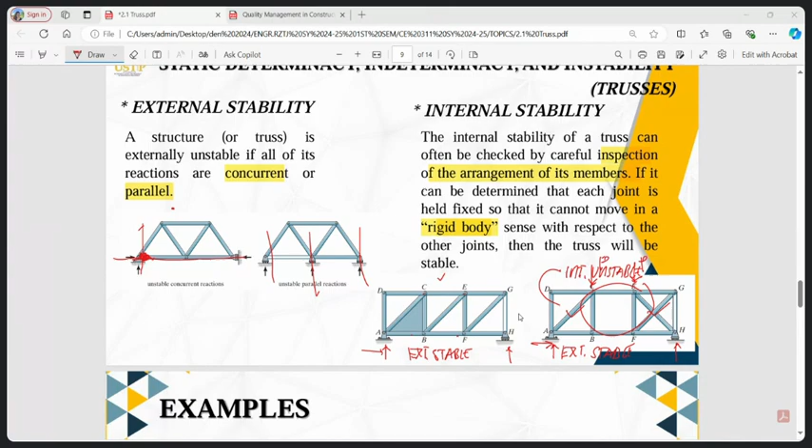So that's it on identifying the determinacy and stability of our trusses. Let's go to the example.

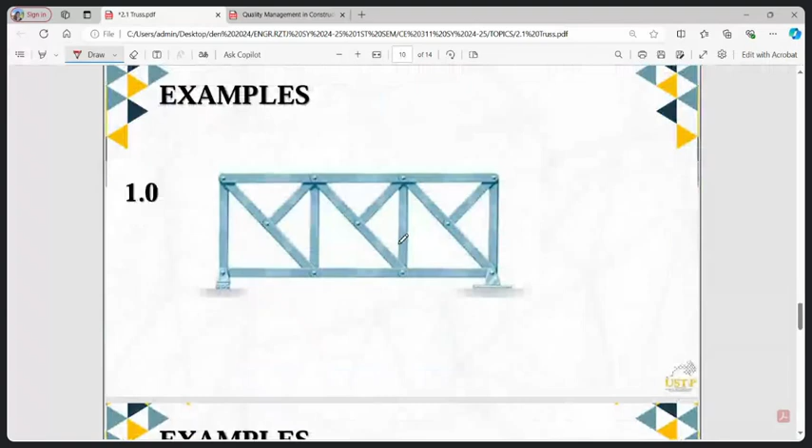Let's check the reactions first. This is a roller, this is a hinge, so the line of action - okay, so our truss is externally stable.

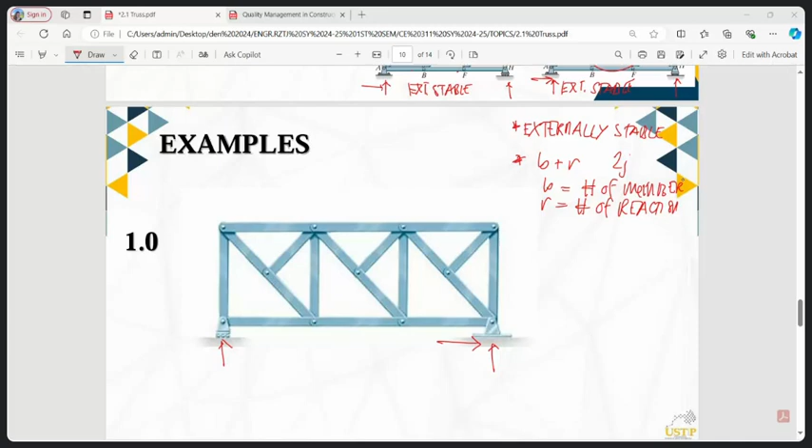Then we will check its determinacy. B plus R equals 2J. B is the number of members, R is the number of reactions, and J is the number of joints. So let's count the number of members.

Careful counting: 1, 2, 3, 4, 5, 6, 7, 8, 9, 10, 11, 12, 13, 14, 15, 16, 17, 18, 19 members. Remember class, members are separated by a pin - pin to pin you consider as one member. If the member overlaps and there's a pin in the middle, with no pin in the middle, you consider this as one member and one member.

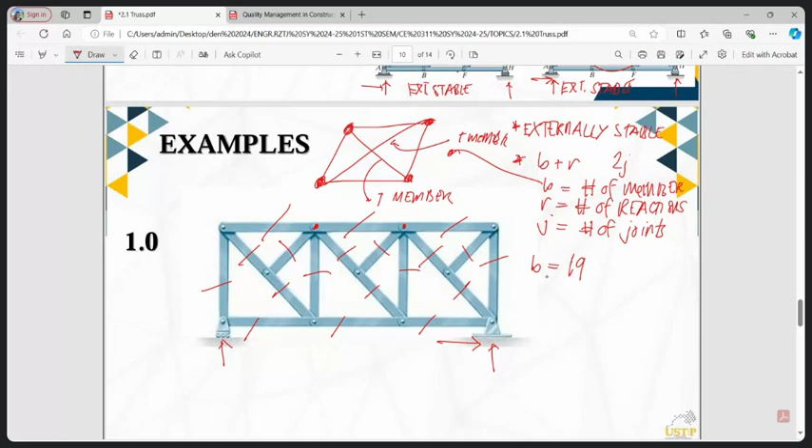So B is 19, reactions is 3. Number of joints: 1, 2, 3, 4, 5, 6, 7, 8, 9, 10, 11. So 19 plus 3 equals 2 times 11, so 22 equals 22. So our truss is statically determinate.

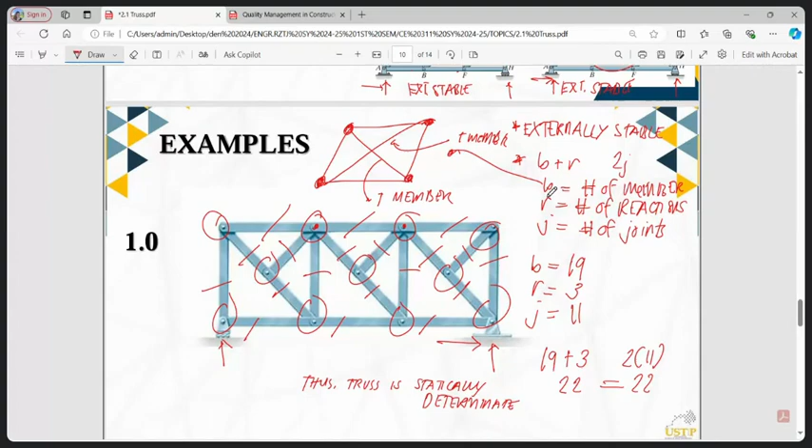That's how it is. Example number 2: this is a hinge, this is a rocker. So okay, our truss is externally stable.

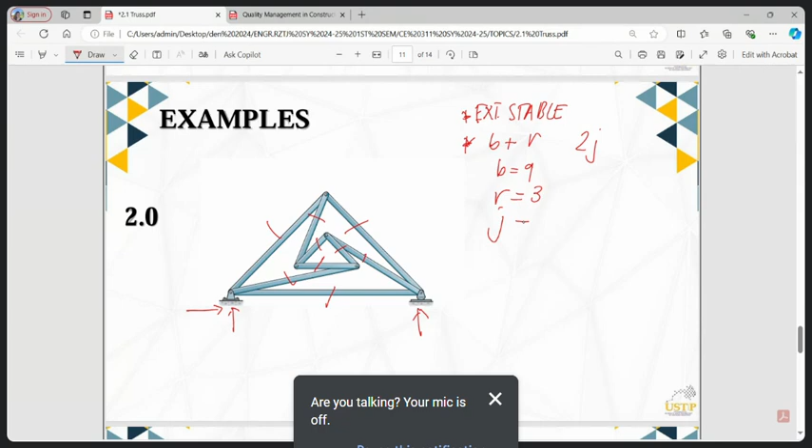So B plus R equals 2J. Number of members: 1, 2, 3, 4, 5, 6, 7, 8, 9. B is 9, R is 3. J is 1, 2, 3, 4, 5, 6. So 9 plus 3 equals 2 times 6, that is 12 equals 12.

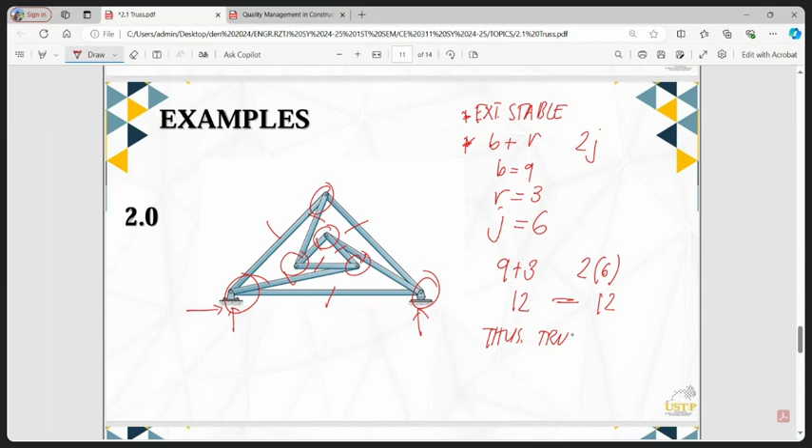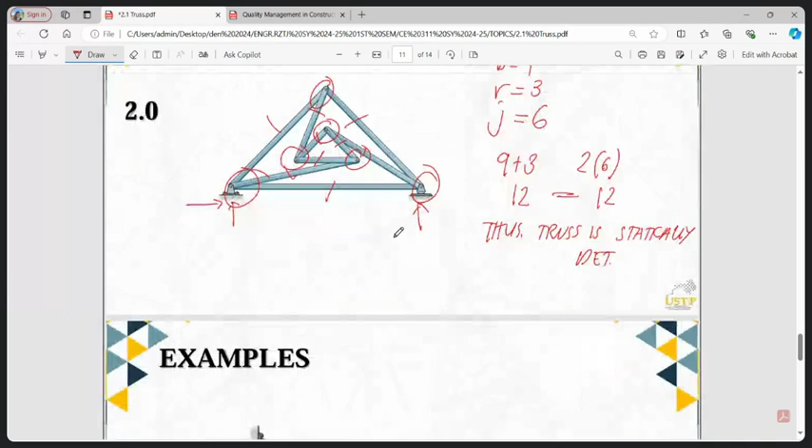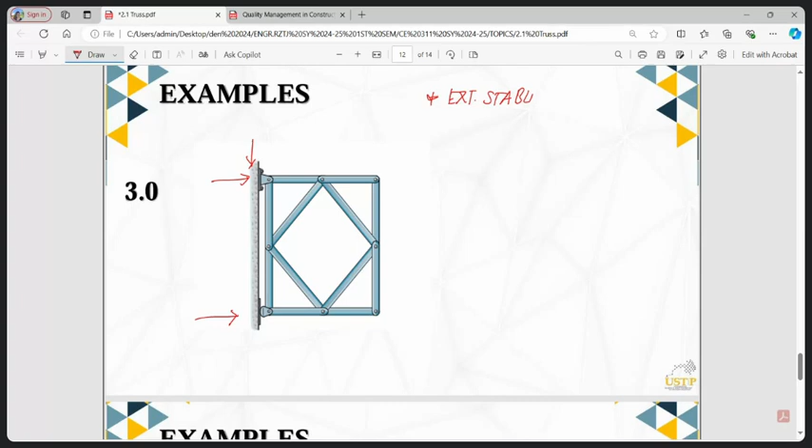Example number 3: one hinge, and also one rocker. So, externally stable. Then check for the determinacy.

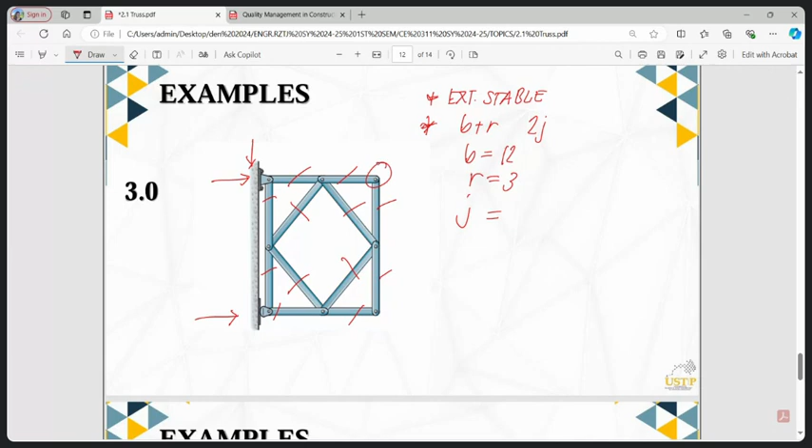B plus R equals 2J. Our B: 1, 2, 3, 4, 5, 6, 7, 8, 9, 10, 11, 12. R is 3. Number of joints is 1, 2, 3, 4, 5, 6, 7, 8, so 8. 12 plus 3 equals 2 times 8, so that is 15 and 16. So 15 is less than 16.

So this is internally unstable. Thus the truss is unstable - the truss is unstable, because it's less than.

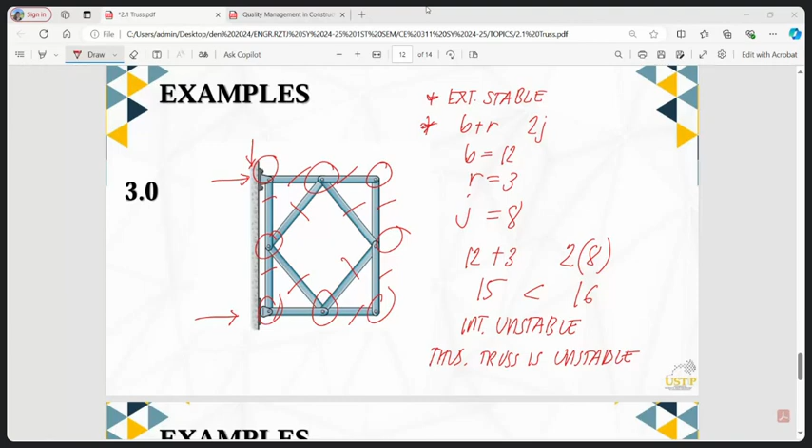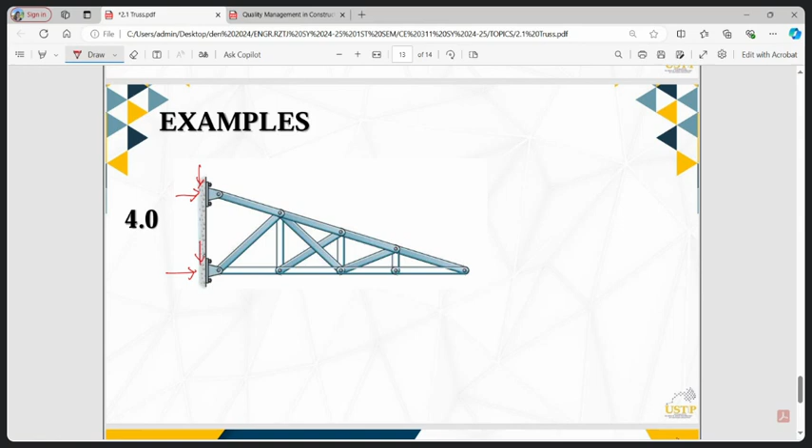Alright, so it's unstable. So example number 4: this is a hinge, this is also a hinge. So okay, this is externally stable.

So check for the determinacy. B plus R equals 2J. Our members: 1, 2, 3, 4, 5, 6, 7, 8, 9, 10, 11, 12, 13. Now look at this - there's no pin in the middle, so it means this cannot be counted separately. We only count this as 1, so 14, 15. So: 1, 2, 3, 4, 5, 6, 7, 8, 9, 10, 11, 12, 13, 14, 15.

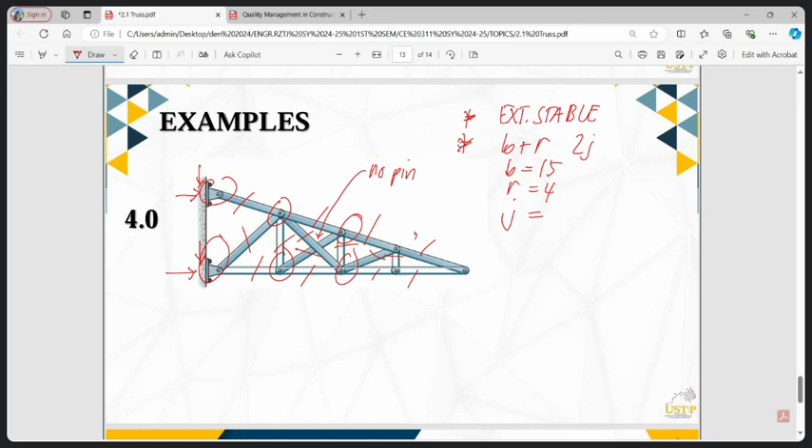Our R is 4. Our J is 1, 2, 3, 4, 5, 6, 7, 8, 9. Our J is 9. So 15 plus 4 equals 2 times 9, that's 19 versus 18. Thus the truss is statically indeterminate.

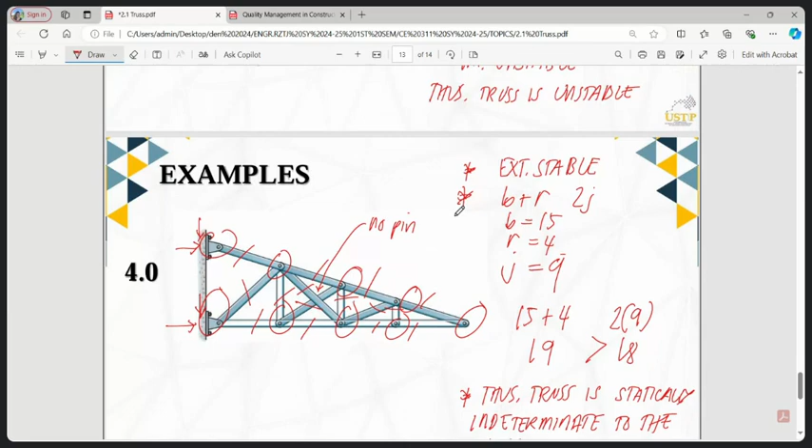Indeterminate to the first degree. So it's the same calculation, same computations, just different equations - different for beams and trusses, and different for our beams and frames compared to our trusses.

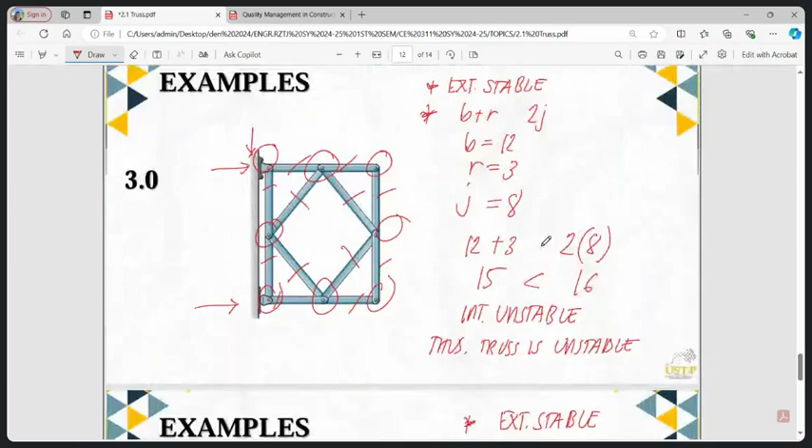So that's it for the determinacy and the stability of trusses.

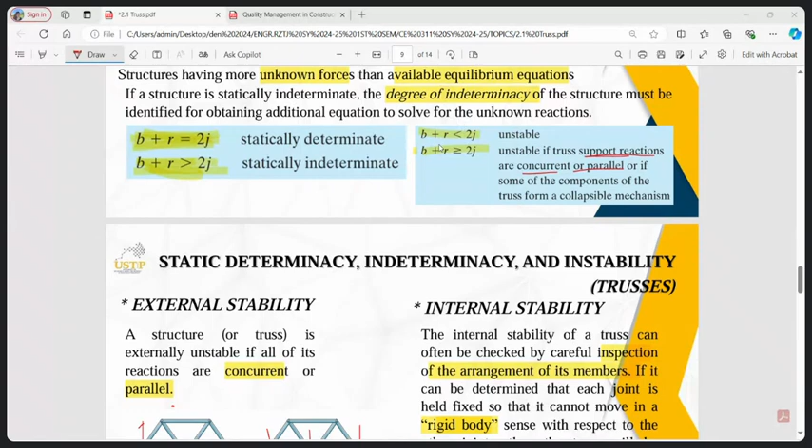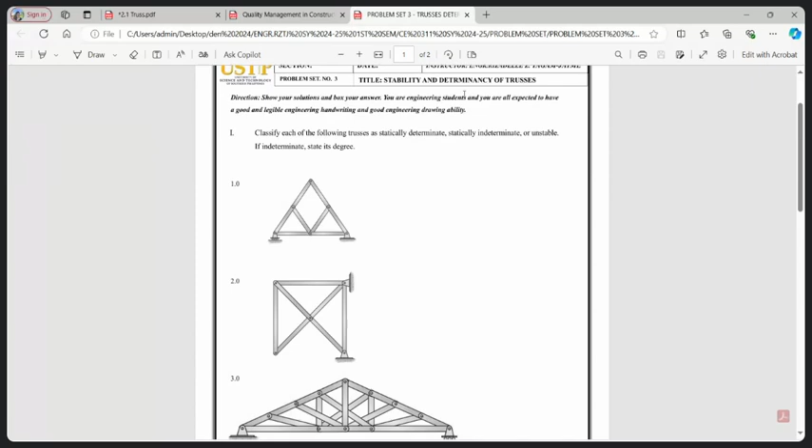So you will solve the determinacy and stability of trusses. This is easy - first you identify if it is externally stable or unstable, and then you compute the degree of determinacy, state it. You identify if it's determinate or indeterminate, then state the degree of indeterminacy.